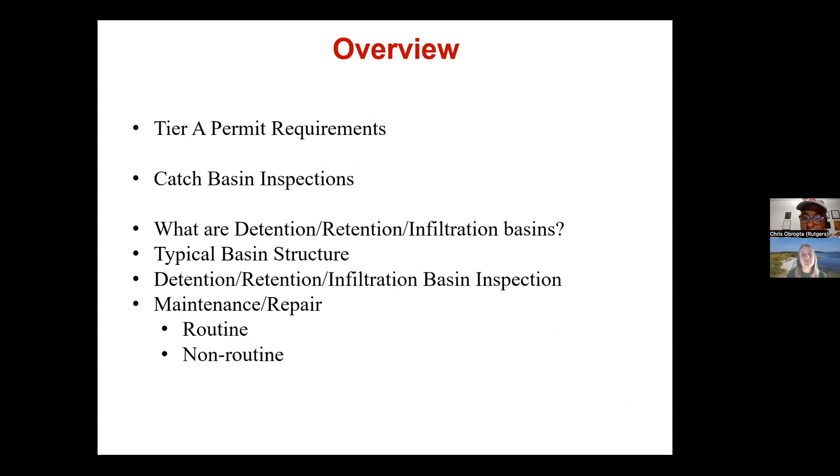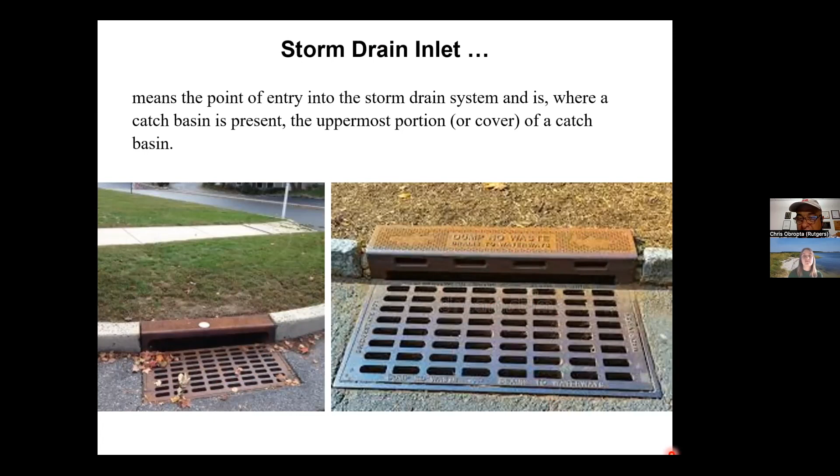That box is the catch basin, and you can see this one has a big opening on it, and this one has a small opening on it, so that water bottles and things can't get in there. And this design on the right-hand side is the one that New Jersey is trying to get everybody to install, and actually it's requiring people to install that now.

So every town has a permit. All 565 municipalities have a permit for what's called their municipal separate storm sewer system. So that's for the catch basins and the roads, for their detention basins, for their drainage ditches, for those inlets I just showed you. And that permit requires towns to inspect these inlets at least once a year and make sure they're operating properly. If they're not operating properly, they have to clean them and make sure that they get rid of the trash and the sediment.

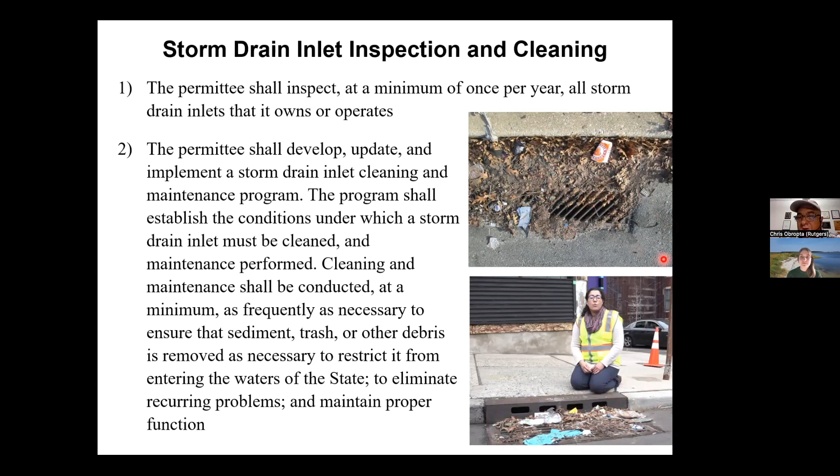You can see I've got some pictures of some that aren't operating properly. You can see this here up top right, loaded with garbage. I don't know, is that a Popeyes cup there? Maybe, I don't know. And then we have one down here, and this is kind of city of Newark. Maybe I should ask Natalie if I could use their picture, but this is a picture we use all the time. But you can see when you have this debris on it, water can't get in there. And it's going to flood the roads, and that's going to be a big problem. So cleaning this is crucially important for the town.

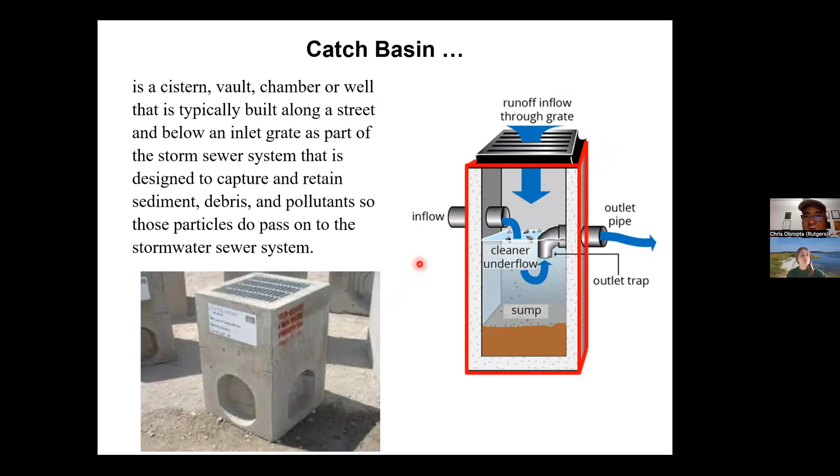Okay. The next thing we have to think about, that's the inlet. So next thing is the catch basin. So once again, you have the inlets on top, the catch basins underneath. So it's this concrete box. Sometimes in older towns it's made out of bricks, but the idea is the water's going to come in, it's going to fill this box up, and then it's going to go out. So as fast as the water comes in, fills it up, goes out the pipe. Maybe there's another pipe coming in from the box upstream. This is kind of what it looks like when it's delivered to the site. It's usually a pre-manufactured concrete box, and then they cut holes in this to put the pipes in. So this is what the system is. So these have to be cleaned on a regular basis too.

Okay. It's a little different for these because a lot of towns have many catch basins. I worked in a town like Hamilton Township in Mercer County. I believe they have like 7,000 catch basins. So the idea with this is that the state wants you to inspect these once every 5 years and clean them when they need to be cleaned. Okay, so what they say is if you have less than 1,000 of them, you should be inspecting every year. But if you have more than 1,000, then you can divide it up and do 20% of them every year over the 5-year period. Okay, so if you have 4,000 basins, basically you're going to do 1,000 every year for at least the first 4 years, and then maybe the 5th year have some time to go back and clean the ones that are really dirty.

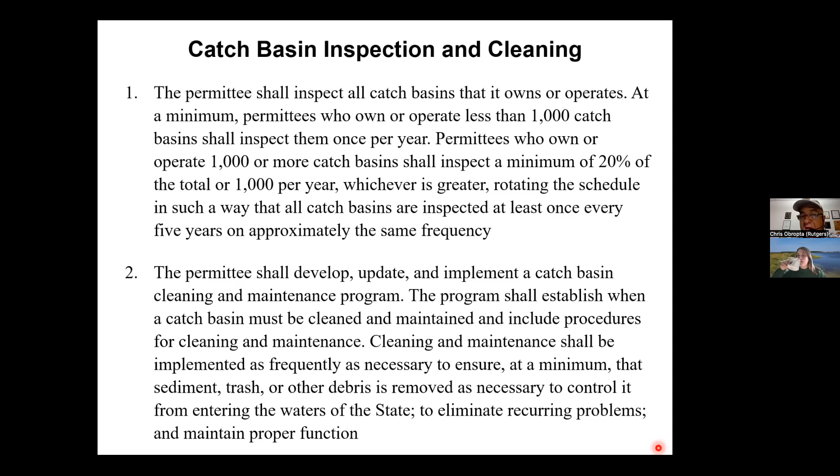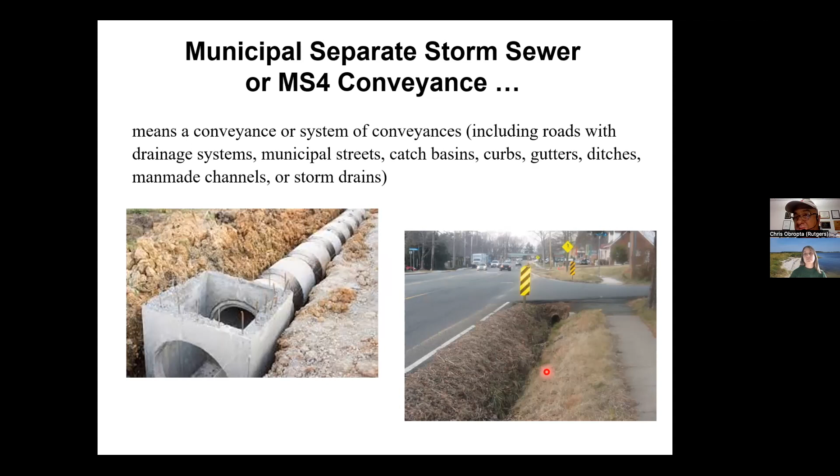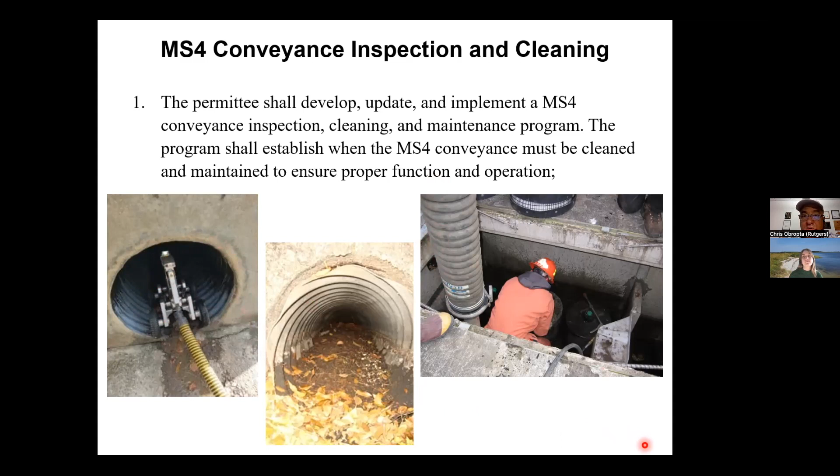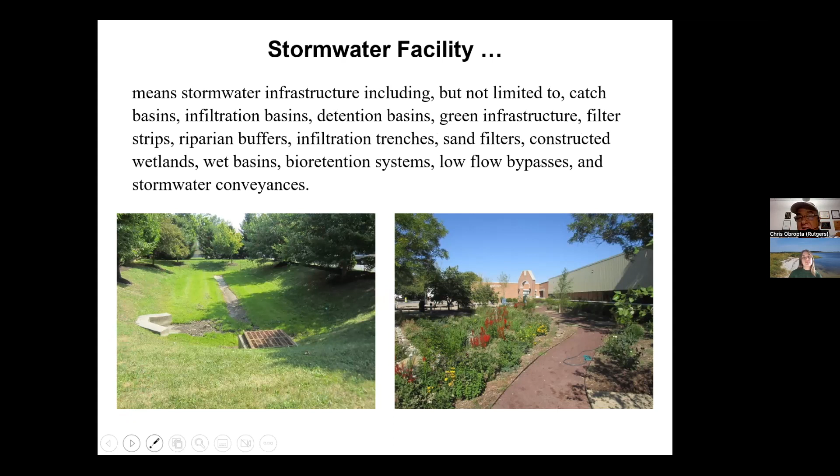And what you're required to do is you're required to inspect these and maintain these on a regular basis. So every one of these systems here should have a maintenance plan associated with it. And that maintenance plan talks about how often it should be inspected, how often it should be cleaned, how to clean it. So you're supposed to follow that maintenance plan. If you don't have a maintenance plan, that's a problem, because now the state wants you to inspect it at least 4 times a year.

Most maintenance plans say you only need to inspect it once a year, but if you don't have a maintenance plan, they want you to inspect it 4 times a year and inspect it every time after you get 1 inch of rain. So I think what this leads me to believe is that many towns, if you don't have a maintenance plan for a system, you should develop one, because it'll reduce the amount of inspection you need to do, because inspecting these once a year is probably all you really need to do.

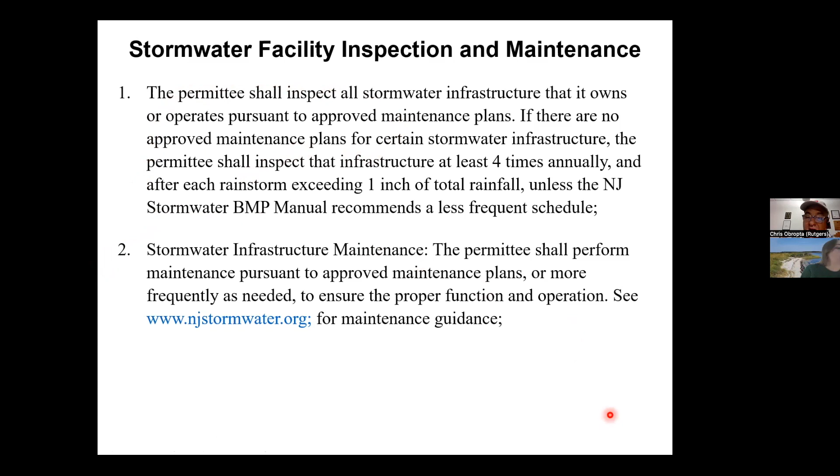Okay. And then if you see it's not working, you have a certain time schedule to maintain it. And that corrective measure has to be done no later than 90 days from discovering that there's a problem. So in other words, you go into a detention basin and you see there's a problem, it's clogged, you've got 90 days to fix that problem.

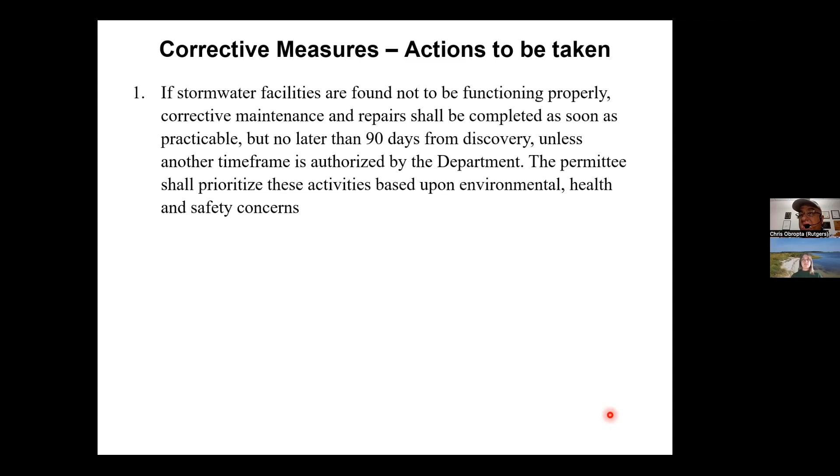Okay. The other big thing with this is that we want to keep good records. A lot of towns are doing these inspections. A lot of towns are doing this maintenance, but they're not keeping maintenance logs. They're not doing maintenance reports. And those are crucially important, because that's what gets sent on to New Jersey DEP to show that you're complying with your permit.

If you don't do the reports, DEP assumes you're not complying with the permit, and then you've got a problem. You could be fined by the state. They could take an action against you and make you do certain other things. So that's a very, very important thing, right? To be able to do these maintenance logs and reports.

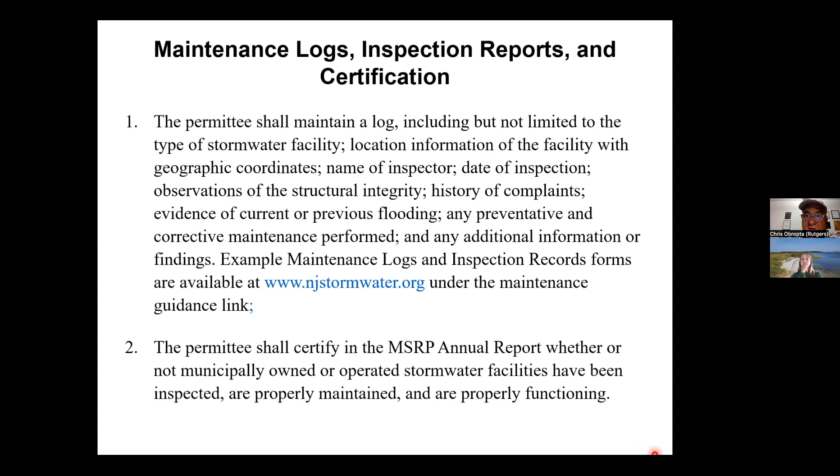So let's talk a little bit about inspections. What do we look for? So when we're inspecting the inlets, the inlets themselves, that grate on top of the catch basin, all we're really looking to see is it open. Can water get in there? If water can't get in there, if it's clogged with, like the slide we saw, debris, Popeye's food cups, whatever it is, it needs to be cleaned, right? So when we're going to log it, we're going to log what type of inlet is it, how big is it, where is it sitting, is it labeled?

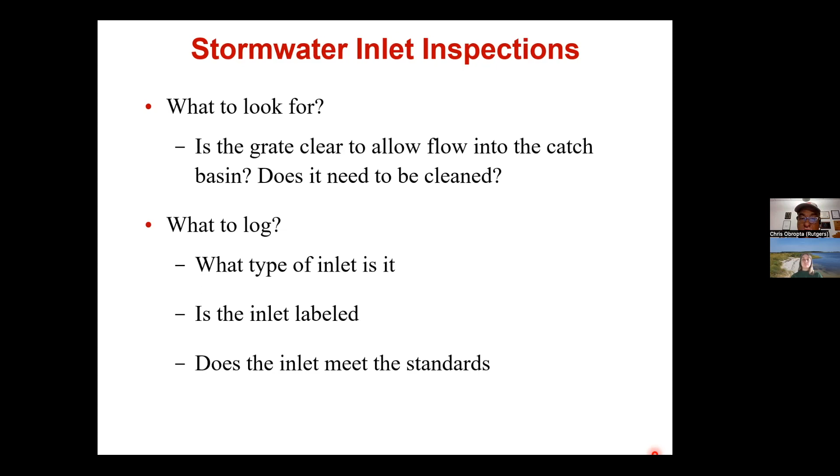Most inlets have a number associated with them, whether it's just in the township's files or it's actually on the inlet itself. And then does the inlet meet standards? And what that means is, does the inlet have certain size openings on it? We'll talk a little bit more about that in a second.

For catch basins, a very similar thing. Now, the catch basin is kind of hard, because if the inlet's not clean, you can't really see in the catch basin, right? So a lot of times we're taking a heavy-duty flashlight, we're looking in there, we're trying to measure how much debris is in there. We want to make sure that's structurally stable. A lot of catch basins are surrounded by asphalt, and that asphalt can cave in and make it structurally unsound. So that's one thing we always look at and identify quickly, because that needs to be repaired, because that could be a hazard to automobiles or bicycles or even people walking on the street.

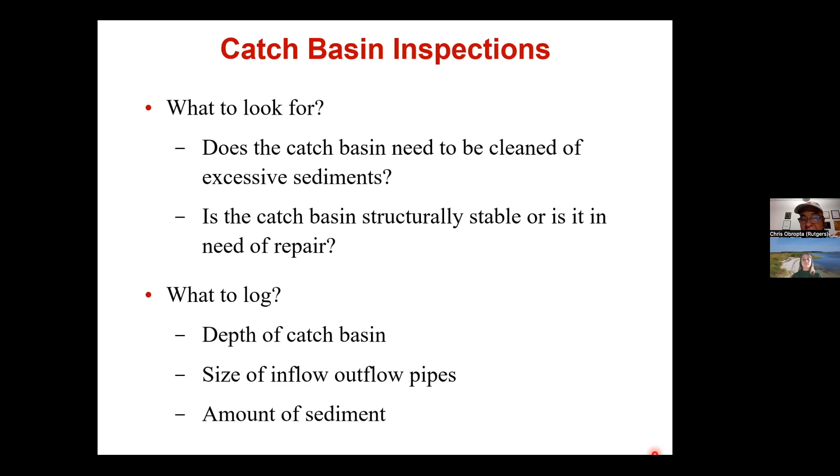So once again, we log how deep the basin is, how many pipes are coming in and out of it, how much sediment's in it. So these are the things that we log in our inspections.

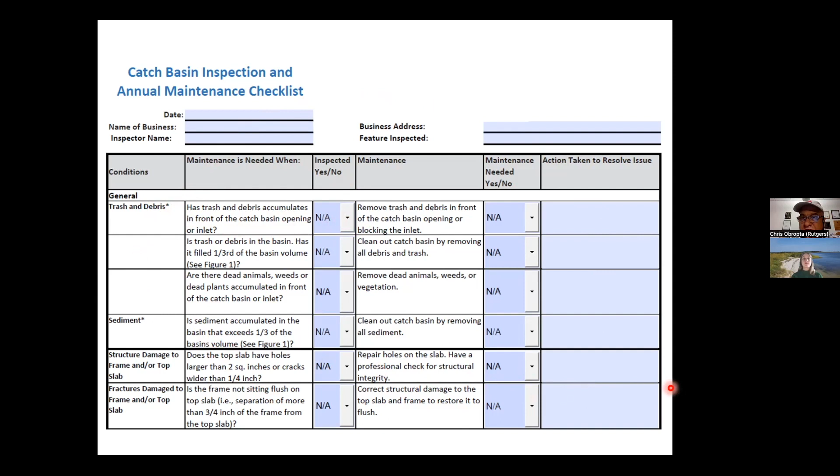And here's a typical inspection report that you can use. This is obviously done on a computer, so you can go to trash and debris. The first item here has trash and debris accumulated in front of the catch basin opening or inlet, and then there's a pull down here. You click on the button, you can say yes, no, not applicable. These tables are available and you can download these. I think this one might be from Washington State. A lot of different states have different ones. So we can see these are checklists.

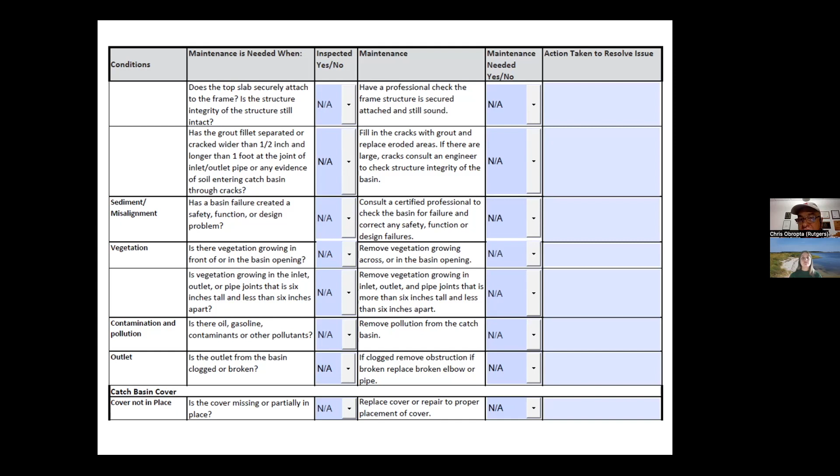Now, a lot of people have these on paper where they just write notes in. Other people have these on some sort of iPad where they go in and they can just plug in the numbers. You could also get an app for your phone and just go out and inspect it that way. It just makes it a lot easier when you come back to the office. You can upload it into the computer. So these are some of the things that they look at.

So, stormwater inlet catch basin maintenance. You want to clear the vegetation and debris. We actually have seen inlets and catch basins where trees are growing out of them. They're not supposed to have trees growing out of them. They're supposed to be empty so water can go in them, right? So you want to make sure that there's not too much sediment in the bottom. This one actually has what's called a sump in it, so it's a little deeper. A lot of them, the bottom is right at the bottom of the pipe, right? So water comes in and water goes out. In this case, it allows some sediment to settle out in here. And the idea is once the sediment gets about halfway full, you need to pump it out and clean it out and vacuum it out.

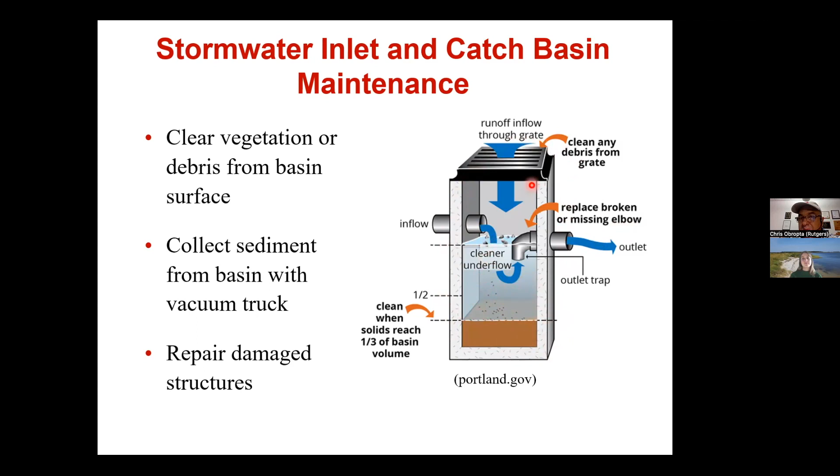Is there any structural damage? Is this concrete all in good shape? Is the grate in good shape? Are the pipes in good shape? So these are things that we look at when we inspect these.

So the other thing we look at are stormwater basins, and there's three types of basins that we think about. So one is a detention basin. You've seen these throughout New Jersey. They're these grass basins, usually with a concrete channel in them. They fill up with water during the storm event. The next day they're dry. They let the water out slowly. So they detain the water, they hold it for a little period of time, they let it out after the storm.

A retention basin retains the water, so it always has water in it. So there's always 3 or 4 feet of water in it. It's also referred to as a wet pond. When it rains, additional water comes in and increases the depth. So it may be 4 feet deep on a regular basis; when we get a big storm, it may raise the depth to 7 feet deep. And then all the pollution kind of settles out into that retention basin. So that is always wet, often referred to as a wet pond.

An infiltration basin is a little different. So water goes in, it's got a smaller opening going out of the basin, so the water will accumulate in there and then slowly percolate into the ground. So the idea is that the water is going to infiltrate more than just hold it and let it out slowly.

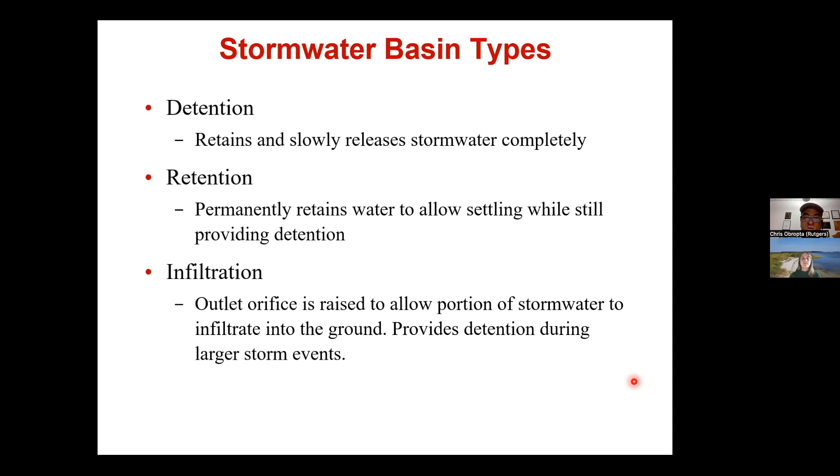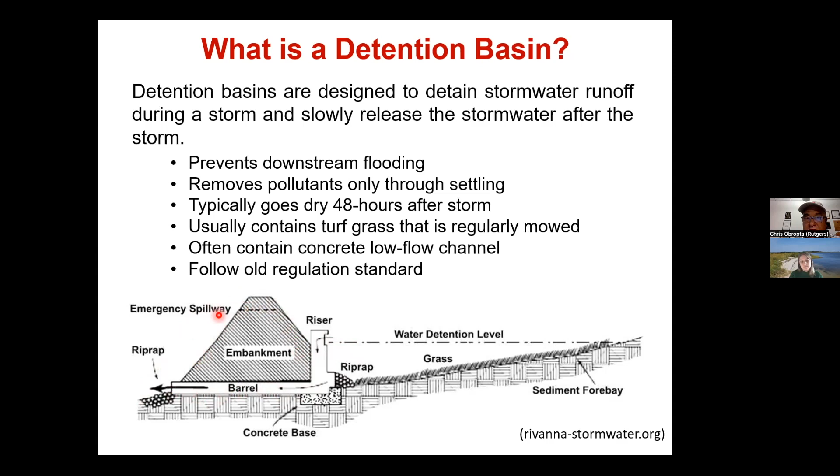It's going to hold it and let it soak into the ground, which is the big difference between the infiltration basin and the detention basin. Okay, so we can see the detention basin here. A standard process. You have a riser here where water comes in to the basin. It slowly goes out. Eventually it rises this level and it'll come out and be released under this embankment, the edge of the basin. Usually within 24 to 48 hours, these are dry.

They usually have these concrete low flow channels in them. That's to hurry the water out so there's no mosquito breeding. These tend to clog quite a bit with sediment, and they have to be cleaned out on a regular basis. They tend to have a concrete box at the outlet, usually with a grate on it. This grate serves a couple purposes. It keeps trash from going out of the basin, so you can have a place to accumulate it. It also stops children from getting washed into the pipes.

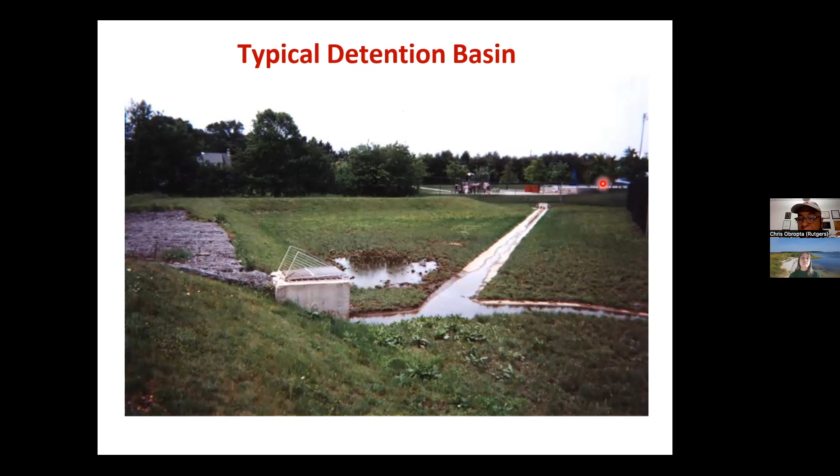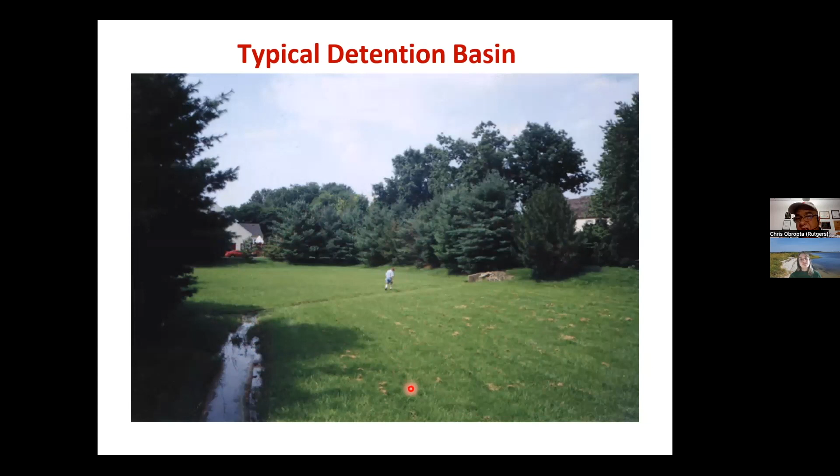Okay, so that's another thing. It's really a safety hazard. If kids are playing, big storm event comes, flash flood, they get sucked into this pipe and they could get seriously injured. So here's another typical basin. You see just a grassed area, mowed on a weekly basis, usually not very healthy for the environment. There's no infiltration here. There's no real habitat for pollinators. It's just all turf grass. This one's surrounded by beautiful Norway spruces, which aren't native to the area either. So not a very ecologically sound system.

So retention basin looks very similar, except it always has a deep pool of water. A lot of times it has vegetation growing in it on the edges. And the idea is that once it rains, more water fills up and goes out this outlet here on the top. Okay, so that's another system. You can see one here.

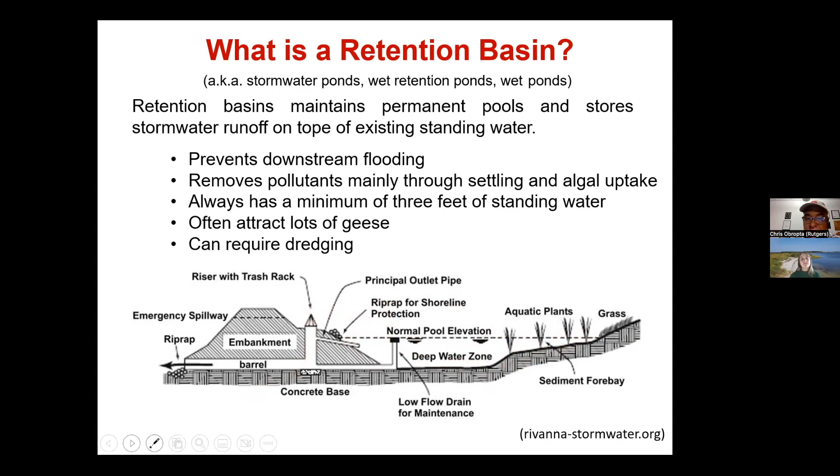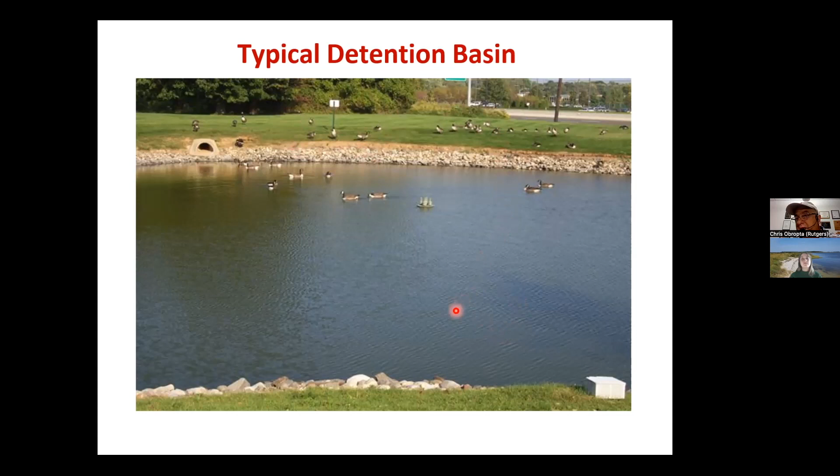This one they decided to line with rocks, which is not very good because this becomes very much of a goose magnet, right? The geese are a tundra species. They land in water. They walk out of the pond and they dine on the turf grass. If you have vegetation around this high enough, 2 or 3 feet high, the geese will not understand if there's predators around there, and they may not land in this basin and go someplace else. So this openness of this basin really attracts the geese.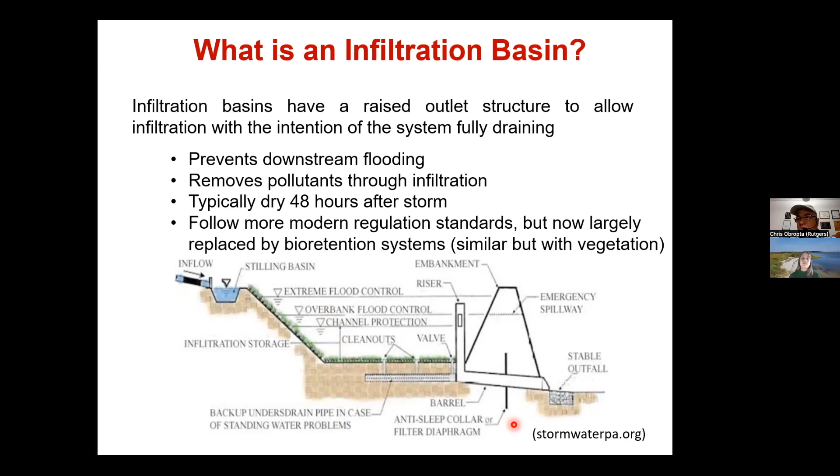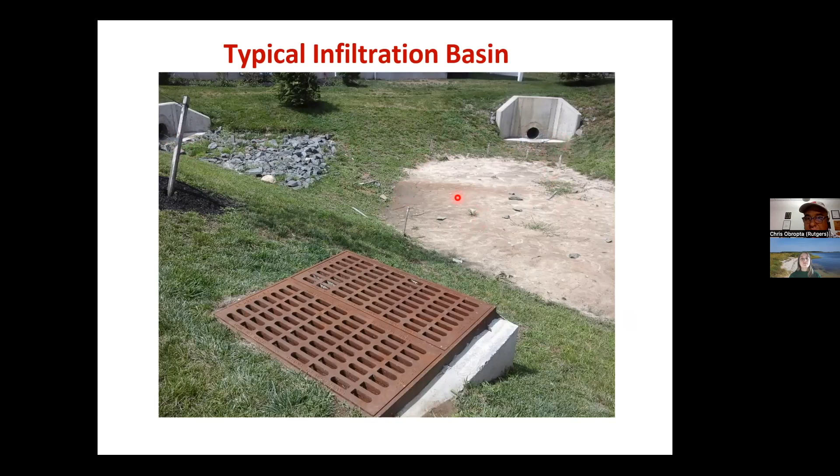And these are very popular systems now, and we're going to see a lot more of these in New Jersey. Matter of fact, when you drive down the New Jersey Parkway on your way to Atlantic City, and you look in the island of the Parkway, you can see a lot of these sand basins there, and those are all infiltration basins. Okay, and you can see here's one here, it's sandy bottom, water's coming in. This water comes in here, water comes in here, fills up with water, and then eventually will overflow out this outlet here. So it's a fairly nice system.

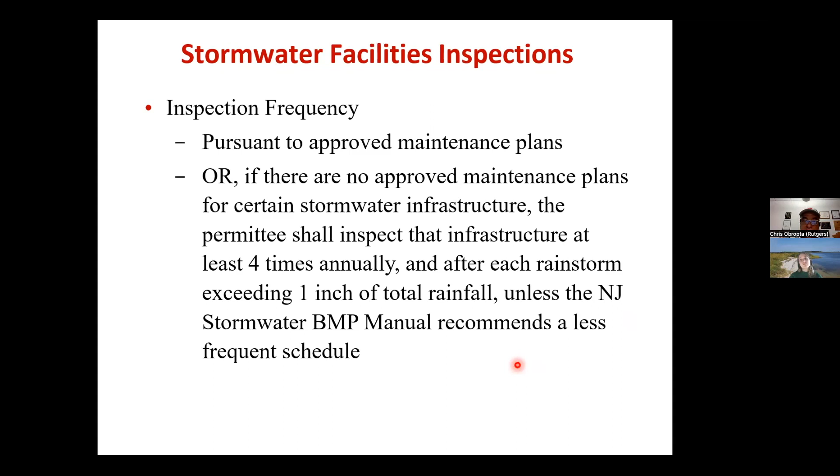So these are supposed to be inspected on an annual basis based on their approved maintenance plans. If there are no maintenance plans, you have to inspect them more frequently. There's things we're looking for when we inspect these. We want to see if the side slopes are eroded or if there's any erosion or scouring in the basin. If it's a wet pond, we want to see if there's any shoreline erosion. We want to prevent that from happening. We want to see if sediment's accumulating in these systems, because if it is, then we have to get that out, because we don't want sediment to accumulate because it'll clog it.

Okay. We want to make sure the inlets and outlets are not broken. A lot of this stuff is made of concrete with steel piping in it, steel rods in it. Once the concrete starts breaking away, that rusty steel is exposed.

Certainly a hazard for anybody, certainly kids that are playing around it. It's always a problem. Is there standing water in it? A detention basin is supposed to go dry within 24 to 48 hours after the storm. If there's standing water after that time period in a detention basin or infiltration basin, that's not working properly. Okay, and it has to be fixed.

In a retention basin, is there nutrient enrichment? In other words, that algae growing on top. Is there a lot of nutrients going in there? So that's another thing that you have to think a little bit about. You may have to do some dredging of that and get some sediment out of there to reduce the amount of nutrients in there. So that may be a way to clean that.

Floatables are always an issue. We're always trying to keep plastic bottles and debris out of our waterways. A lot of times it's accumulating in these basins, which is good because we have a place to collect it and pull it out before it goes out into the bay or the ocean.

Is the grass healthy? Are there bare spots? Is the vegetation desirable or is it not desirable? So if it's filled with cattails, while cattails do a great job of removing pollution, it's really a monoculture and doesn't really provide a lot of ecological habitat. So we want to try to have a more diverse vegetation.

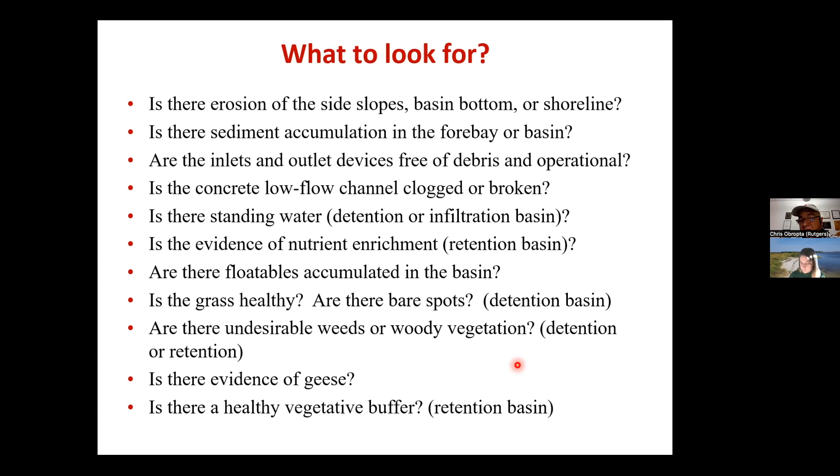Are there geese? Evidence of geese, and we all know what evidence of geese is if you've ever been to any kind of town park. So if we do have geese, we want to try to figure out how to get rid of the geese and maybe put some buffers around the systems. Okay.

So who does the inspection? Well, all the basins, all the facilities that are owned by the township or the city have to be inspected by the township and the city. And like I said, on an annual basis if you have a maintenance plan; if not, you have to do it more frequently. If it is a private facility, in other words, a homeowners association, they have to inspect it and report to the town that it's been inspected, because the town is ultimately responsible to make sure that all these are working, whether they own them or not.

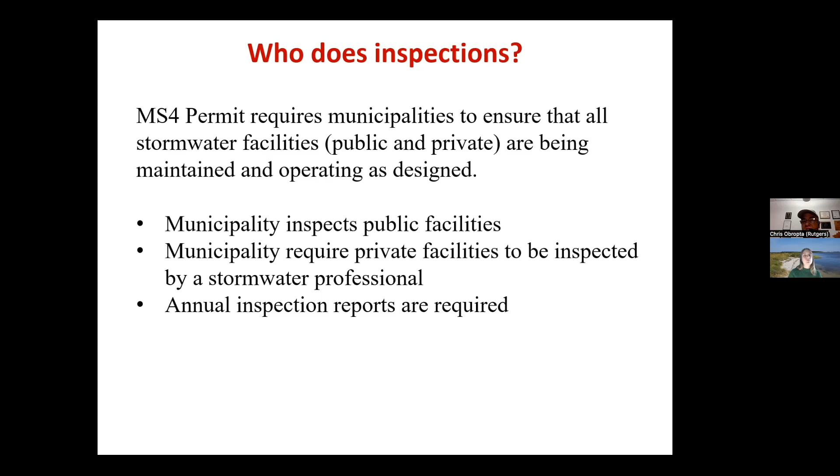So they usually have a system in place where if you're a homeowners association, every year you have to send a report to the town that your detention basin was inspected and it's working properly, and the town takes that, includes that in their report to the state, and that's very important.

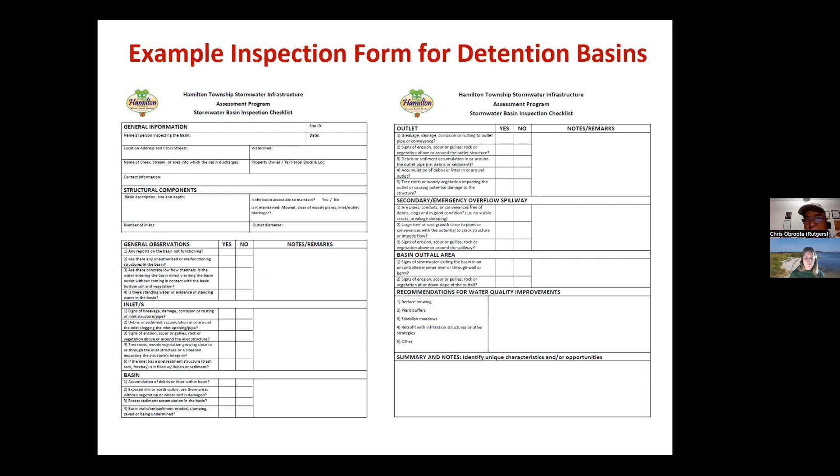And then there's different detention basin inspection forms that we have here, and you can see this kind of goes through all the different observations, the overflows, the spillways, the inlets, the outlets. This is another tool that people can use and get a copy of, and this is the one that we were using in Hamilton Township. And you can see we can kind of go through some of the questions here.

It's very important to write down who's inspecting the basin, because if there's a problem and I'm reading an inspection report, it's nice to be able to go down the hall and talk to Bob or Sue and say, hey, you inspected the basin. Is there anything else you can tell me about it? Or you wrote something here, I'm not really sure what you're talking about. Can you explain it to me a little bit more? So that's why we always have a name.

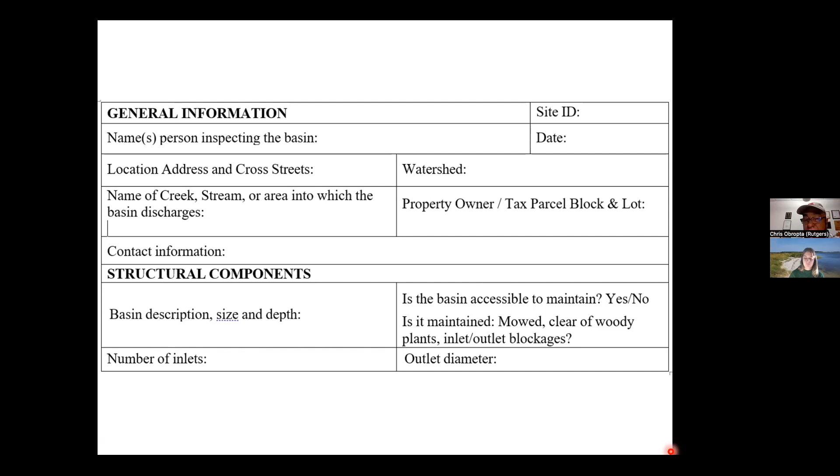And we always talk about the date when it's been inspected, because we always go back and see, did it rain right before that? Is that why there's standing water? Or it hadn't rained for like a month and there's still water and it shouldn't be. So those become things that we look at.

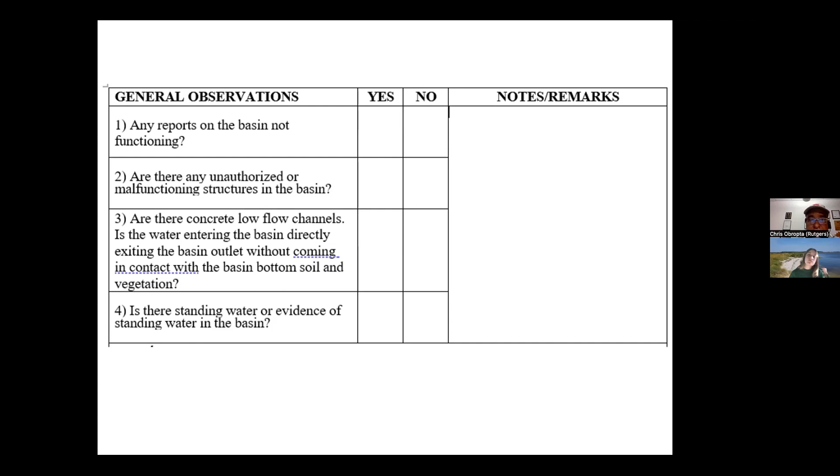General observations. Is it functioning properly? Malfunctioning structures in the basin. In other words, the outlet structure is not functioning properly. Concrete channels are working right, they're not clogged. Is there standing water in the basins? These are just standard things we look at. Inlets, is there any breakage or damage of the inlets? Is there gullying or erosion going on? So these are some things.

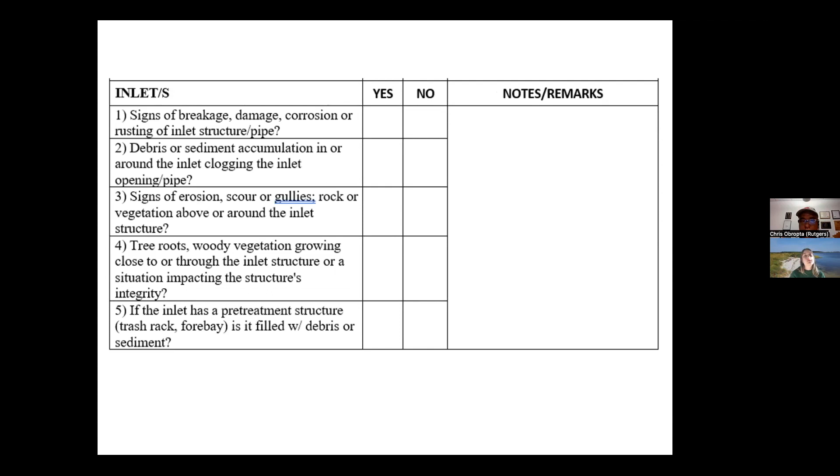A lot of times we'll have vegetation growing in these basins blocking the inlet so water can't get in. So we have to make sure that inlet's clear so water can get into the basin. Okay. Accumulation of debris and litter. It's another thing we always worry about, and that's something we're trying to control.

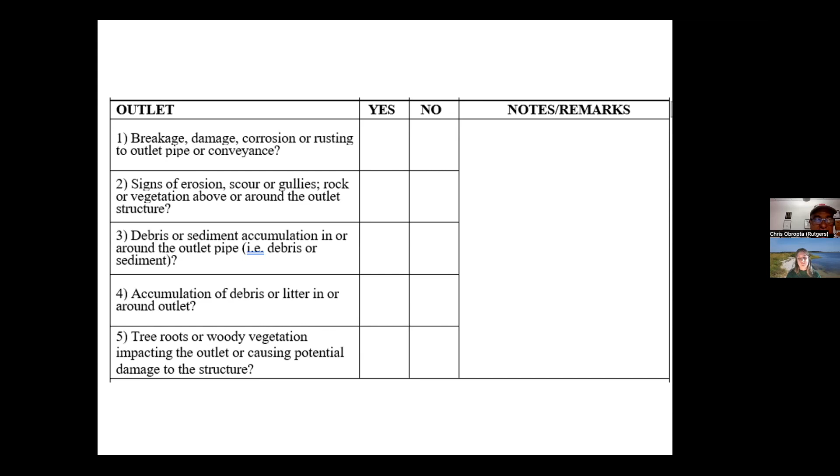And then outlets, the same thing as inlets. We want to make sure nothing's broken, nothing's clogged. Water can easily get out of it. It's not being prevented from leaving the basin when it's supposed to be leaving the basin. And then there's always like an emergency spillway.

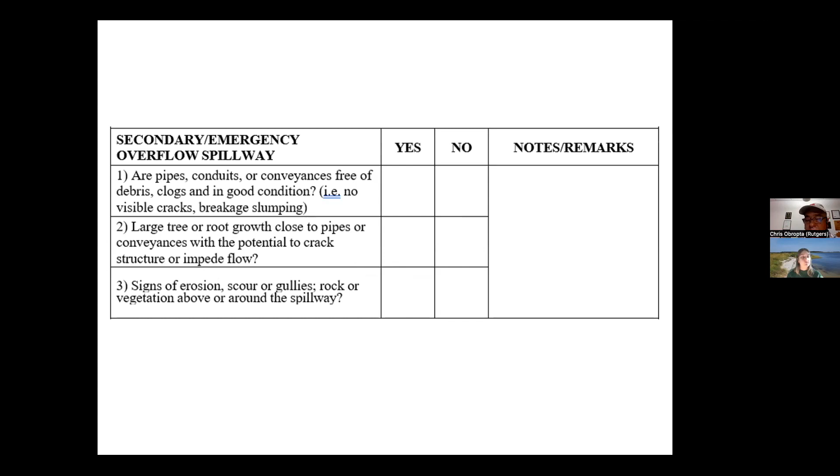If the basin fills up with too much water and it can't get out of the outlet pipe, where's it overflowing? And where that overflow is occurring, is there any erosion associated with that? Is that working okay? And that's another important factor, especially in New Jersey. We're getting these really intense storms. For example, Ida dumped 8 inches of rain over 6 hours, which none of the detention basins can handle. So they were all overflowing at some point. So understanding, was that causing any other problems where that overflow was going?

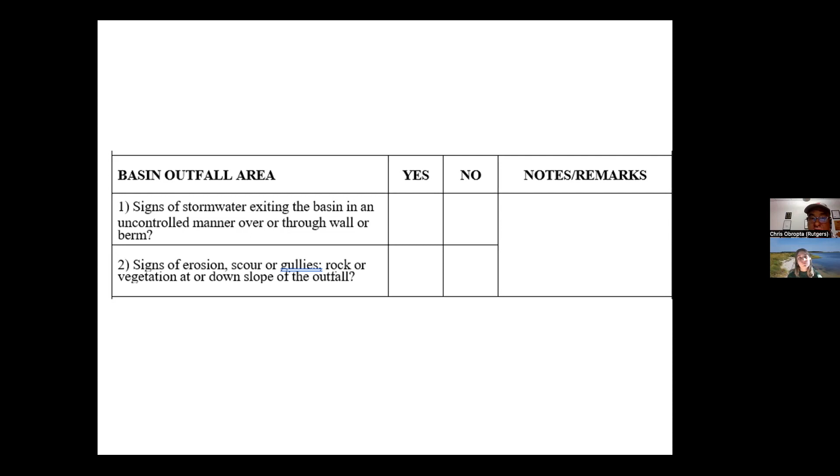And then the basin outfall. So eventually the water leaves the basin, is going to a stream or the bay. Is it causing any problems in that area? So causing erosion at the stream edge or along the shoreline of the bay. Okay, and then we have recommendations that we make. So there's different types of maintenance for these basins. I'll just go through as quickly. So there's routine and there's non-routine.

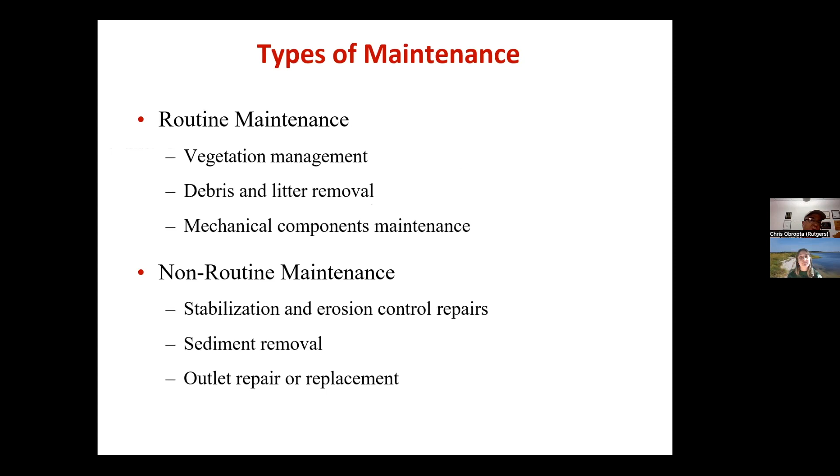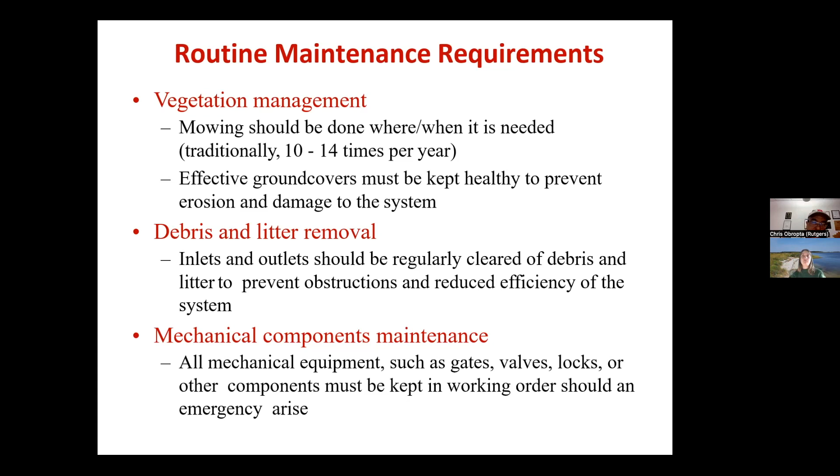So routine maintenance really focuses on vegetation maintenance. So when we're talking about detention basins, you're talking about mowing them on a regular basis, because usually it's just turf grass, right? Making sure the ground cover is healthy, getting rid of debris, making sure all the mechanical components are working, the gates and the valves. In other words, the screens that are on top of the outlet structure, that you're able to lift those up so you can clean out the pipe. Everything's working the way it should be.

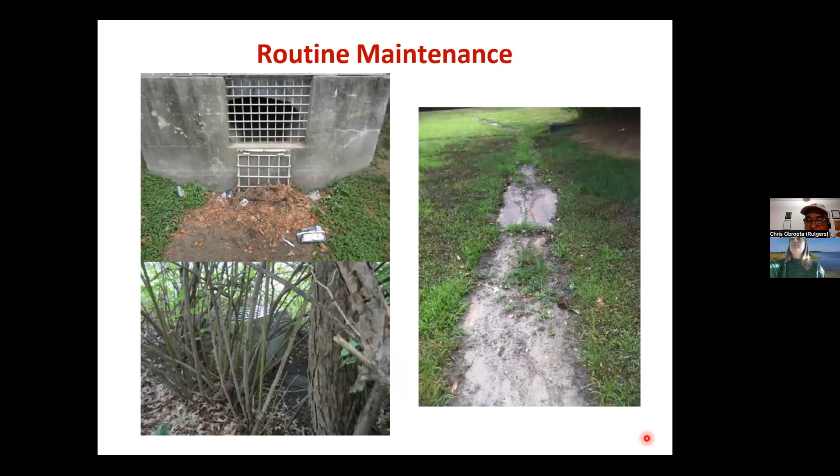And you can see some of the things here. Lots of sediment, that's no good. Lots of vegetation around the outlet, that's no good. This is completely clogged, that's no good. So you can see these things would be taken care of under routine maintenance, right? And then you can also see some other things, these broken pieces. This is not supposed to look like this, right? And you can see this is falling apart under here, and you can see Kyle's actually measuring how big that opening is, so we can figure out how to go back and fix that.

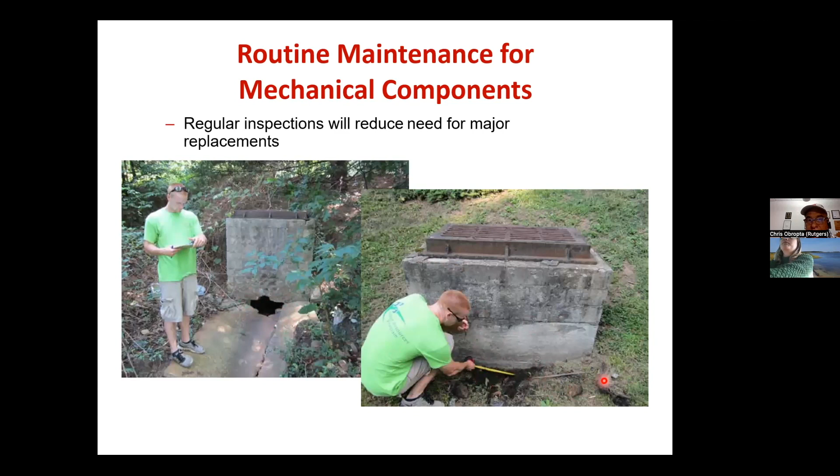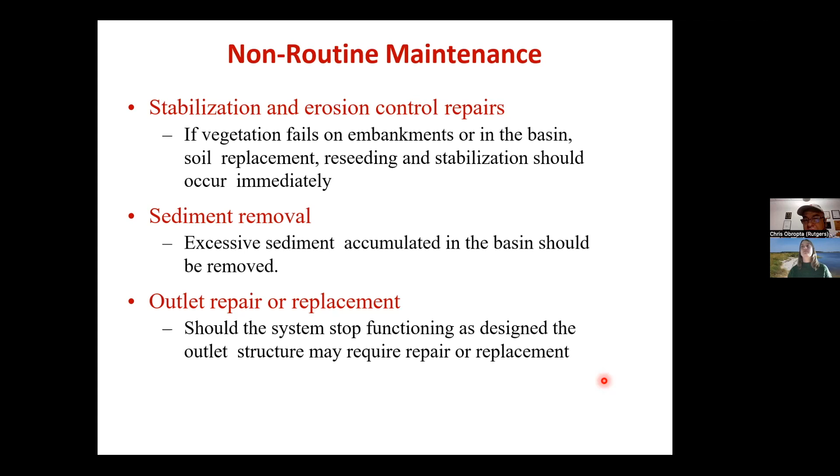Non-routine maintenance, this is stuff that you're not doing that often. Stabilizing, any erosion control repairs, so if there's any erosion, fixing that. Sediment removal. You may be removing sediment out of a concrete low flow channel every couple weeks, but any kind of big sediment removal from maybe a retention basin or a wet pond, maybe that happens once every 4 or 5 years. Okay. Outlet repair and replacement. Sometimes we'll have to take that whole concrete box out and replace it because it's just eroded away. And you can see, this is an example of one that has to be completely redone.

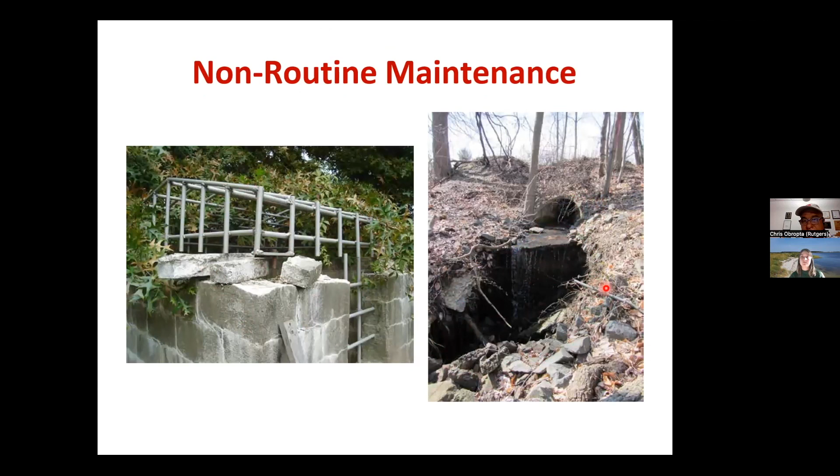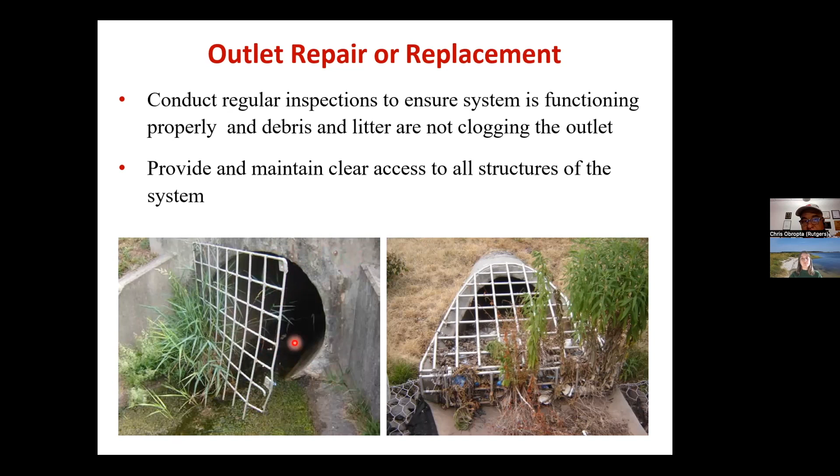And then here's some erosion that happens. This is a concrete pad where water's coming out of the basin here, and you can see it's completely eroded away the outlet, and this has to be taken care of immediately. These are definitely serious problems. Okay. Other things we see, this is all clogged up, but this is another thing. The grate is broken. This is supposed to be bolted on here. It's not working, so that has to be fixed. So these are other things we look at.

So if you have any questions about this, if you're working for a public works department and you want a more detailed talk on this, feel free to give us a call. I'm Chris Obropta. Matt Lacconi is one of my engineers. Matt and I do a lot of this work with towns, helping them do inspections and helping them streamline their process. As we go forward, with new permits starting in January for the municipal separate storm sewer systems, there's more requirements out there. So there's more of these inspection and cleaning requirements that the towns are going to have to work through. And certainly feel free to give us a call, and we'd be glad to talk you through them and do whatever we can to help.

Is that okay, Avery? I'm sorry, that was a little long, but. That was great. Thank you, Chris.

Stormwater management, stormwater infrastructure management is super technical, and a lot of towns we find in our watershed are overwhelmed by it, especially with this influx of the new rules. So hopefully this information is helpful to everyone who's watching to break down all of the requirements, connect you with resources to help you if it's overwhelming for your town, and get everyone to the finish line of proper management of stormwater and really prioritizing this. So I'm hoping a lot of the public works departments will take this video and watch it, and maybe get some benefit out of it, because I think it really clearly outlines what the requirements are, and a lot of people are very confused about that.